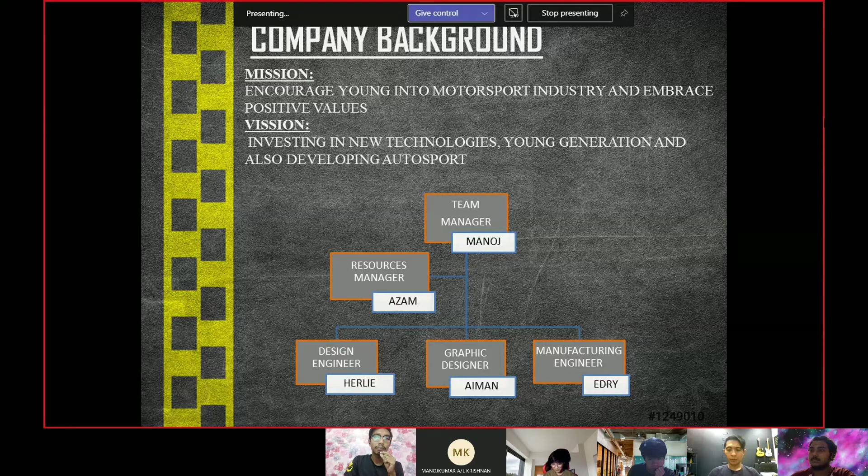Hello, my name is Herlie Jolison, and today I will explain about the concept of design. Our product name is RWD01. For our concept design, it consists of main body, front and rear tires, bearing and drive shaft, front wing and rear wing. Okay, next.

Okay, for the main body, we have modified the design from front to rear. First, we added the side skirt with a curve to ensure good aerodynamics for the design of the F1 body.

The total length for our F1 body is 185, and the width is 60. For the critical part, the side skirt or rear skirt has a chamfer R2, and the distance from the body to the rear of the body is 14.

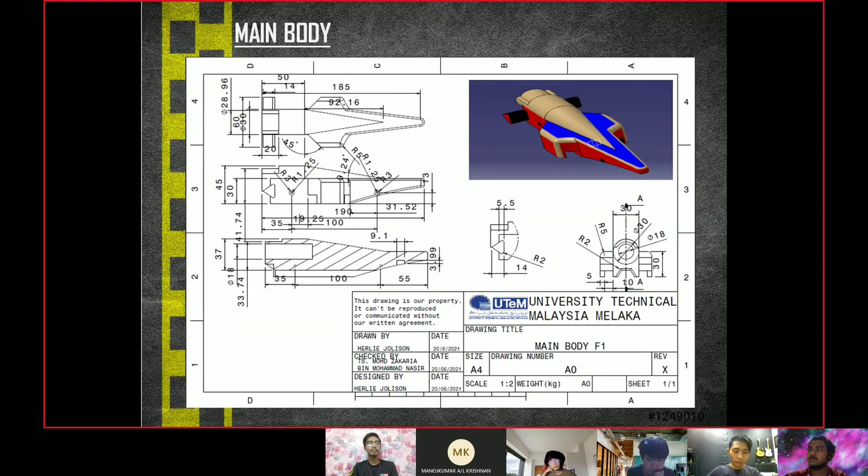For the wheels, in this concept design, I designed the front and rear wheels based on the original design TE37SL. The spoke we made is a concave spoke with zero offset to suit and fit the main body. For the tires, we made a tread pattern to give a sporty look and grip.

It is suitable if this project is printed in 3D. We also made thin tires, so the wheels will look bigger and more sporty.

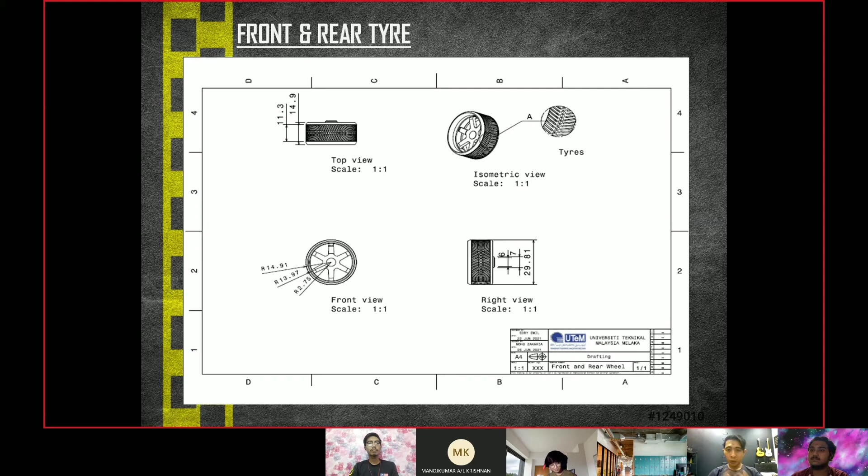Next, we continue with the bearing. The function of the bearing is crucial for the proper function of the hub, tire, and wheel assemblies to work together. The wheel bearing allows friction-free movement and rotation of the hub assembly, thereby providing smooth tire and wheel rotation.

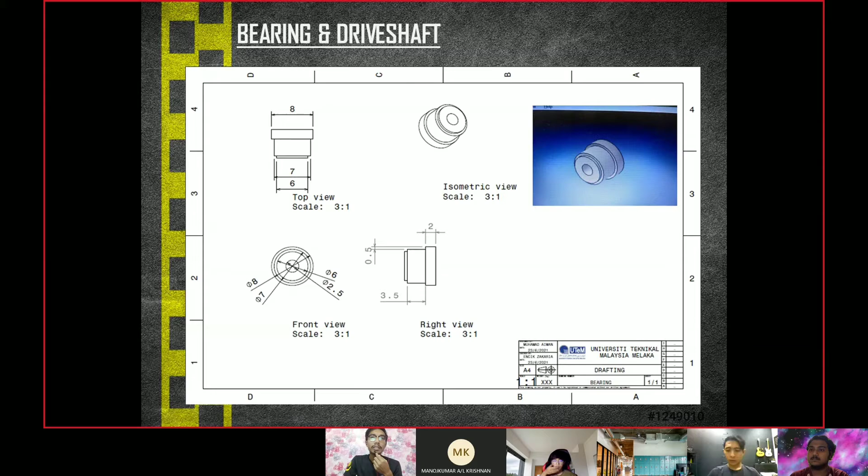Next, the function of the drive shaft is to transfer motion to the tires and reduce mechanical friction. The drive shaft is a component of the drivetrain in a vehicle, with the purpose of delivering torque from the transmission to the differential, which then transmits this torque to the wheels in order to move the vehicle.

I designed this drive shaft with a length of 40. The diameter of this drive shaft is 2.5 mm. This drive shaft is simple but nice.

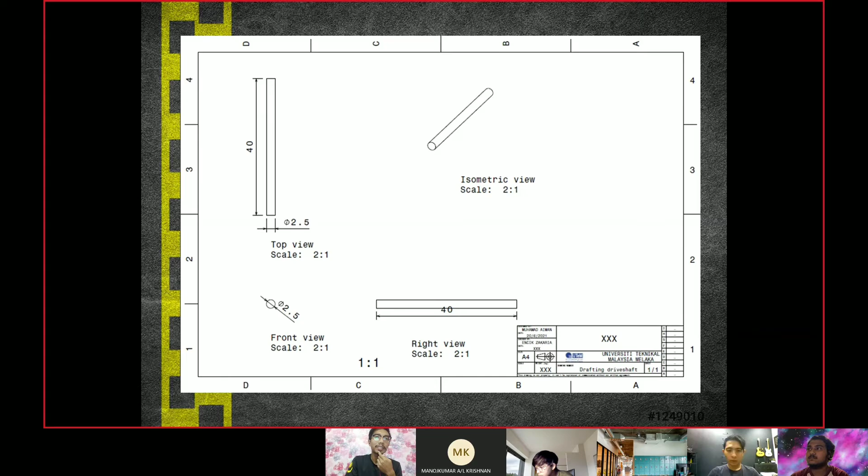Okay guys, my name is Manoj, and I will explain more about the concept behind the front wing design. As you know, the front wing is the part of the F1 that meets the air barrier, which helps create more downforce, more grip, and provides drag to the F1.

The major aspect that plays a better role in the front wing concept is downforce. How we achieve maximum downforce is by having a proper design, with a flat main plate and flap, and so on.

First, the flap needs to have an angle of attack in the range of 15 to 13 degrees. In this range, we are able to achieve the maximum angle of attack, which will eventually improve the drag and downforce.

Next, I've designed the main plate as an airfoil shape, which is a better shape to cut through the air barrier, providing better downforce.

And I've put curves at the end of the main plane, which will create turbulence, which eventually does not disturb other parts and provides better airflow around the rest. So the F1 can achieve maximum speed on the track.

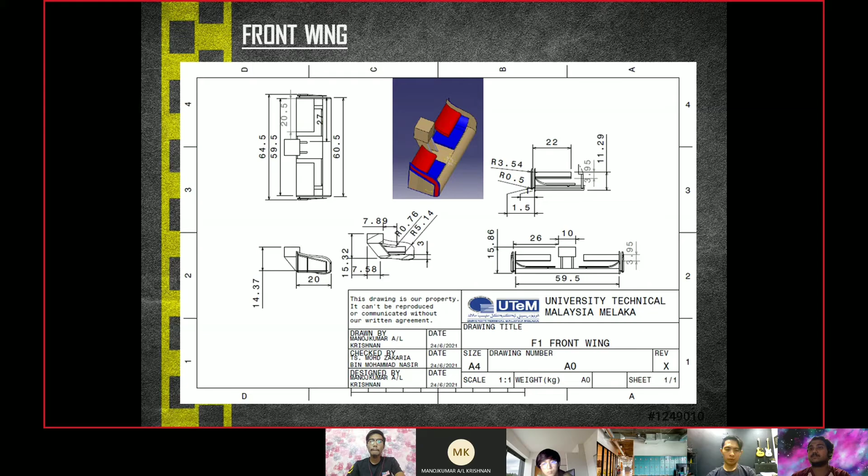Thank you, that's all from me.

For the rear wing, if anyone asks why I chose this design, this design was made according to specifications that have long been established by experts in this industry. With a design like this, it can give a lot of impact to the F1 we have created. The shape and measurement made should be emphasized because it can affect the speed of the car.

I created this design to add more downforce, which in turn adds more rear tire grip. This can improve cornering performance, acceleration performance, and stability at high speed. Okay, that's all from me, thank you.

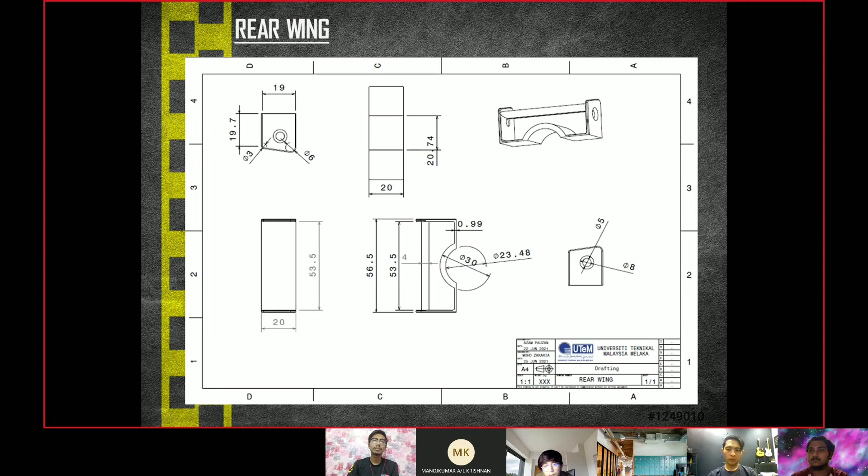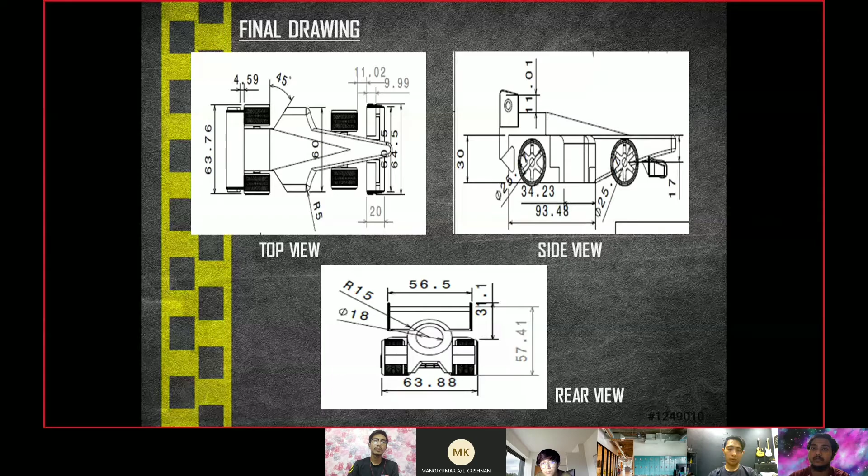We use the software known as CATIA, developed by Dassault Systemes, and we use specific operations to achieve all these drawing materials, which in this case we use for design.

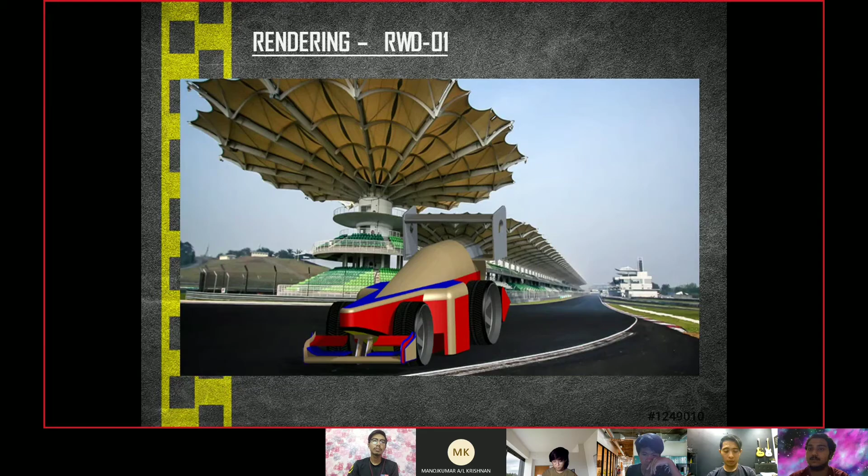Right now I'm about to present to you the final product, RWD01. Okay, this is our final product. We made it into a rendering and added some colors and background so it will be easier and more attractive, as you can see. This is the front isometric view, with a different background.

Next is component analysis. We did some analysis for our design. There are three components that we chose in our design to do the analysis. First of all, we do the analysis for the tire.

The tire displacement magnitude is in mm, and the value we got for the analysis is a maximum of 0.00136 and a minimum of 0.000136. Next is von Mises stress, unit in MPa.

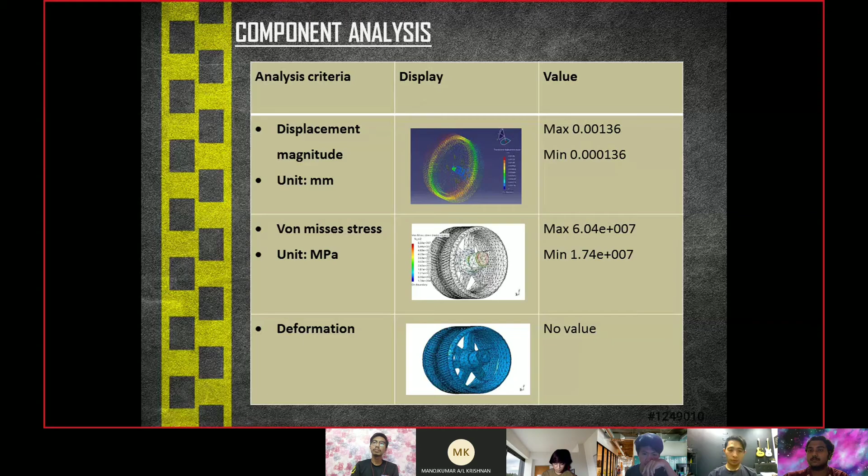For the tire analysis, the maximum is 6.04 MPa and the minimum is 1.74 MPa (megapascal). Below is the deformation for the tire.

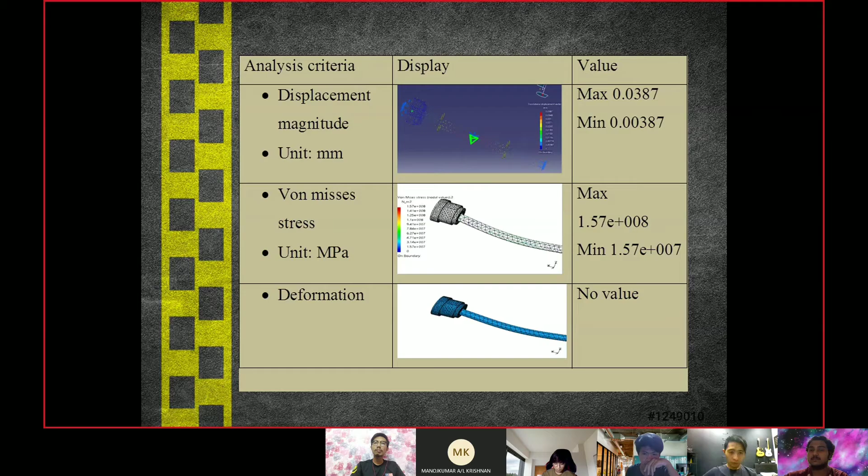Okay, the next analysis is bearing and drive shaft. So the max value for displacement is 0.0387 and minimum is 0.00387. Von Mises stress for bearing and drive shaft is maximum 1.57 megapascal and minimum is 1.57 megapascal times 10 to the power of 7. Next.

So the last analysis for our part design is bearing, drive shaft, and tire. The displacement that we got from the analysis is maximum value 0.196 and minimum value is 0.0196. For the Von Mises stress, it's max 1.13 times 10 to the power of 8 megapascal and minimum is 6.59 megapascal times 10 to the power of 4. That's all from me.

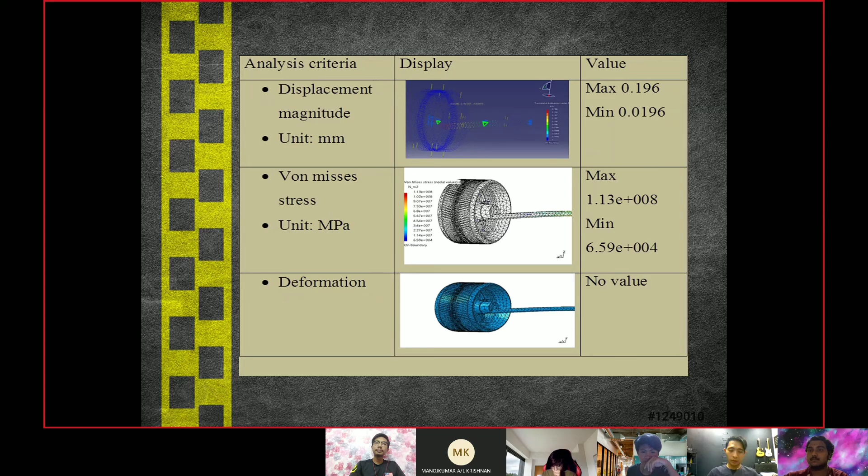Alright, so back to me again. I will present about the factor of safety. For the first factor of safety is the wheel. The material yield strength is 250 MPa. Factor of safety is 4.14. Then the status is pass.

Okay, for the next one, factor of safety is the drive shaft with the bearing. The material yield strength is 250 MPa. The factor of safety is 1.59. Then the status is pass.

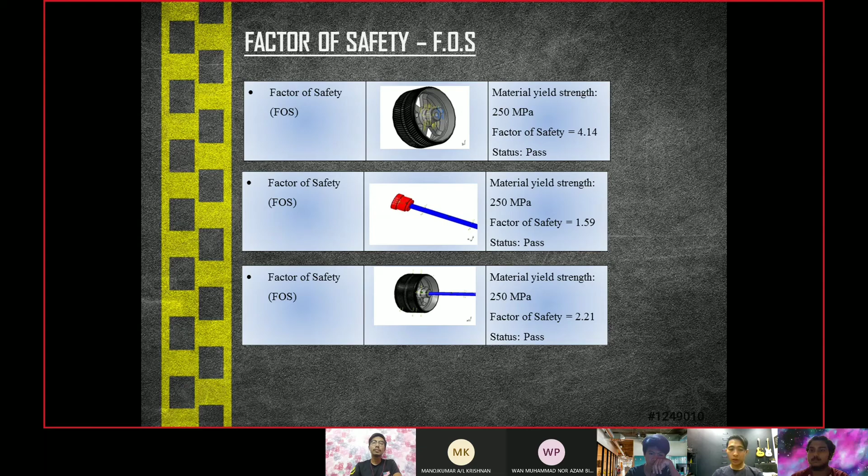Okay, then we go to the last. For the factor of safety, is the drive shaft, bearing, and the wheel. So the material strength is 250 MPa. The factor of safety is 2.21. Then the status is pass. Okay, so we go to the next slide.

Okay, so for the discussion, what we have discussed is the technique to improve design failure. To control the failure occurring, we solve it by doing some modifications on the geometry of the product and determine the problem by looking at what comes up from the simulation analysis.

Okay, we go to the next one. We need to correct the dimension accordingly. Then after that, the ductility and durability of our tire also failed as a result obtained, and we overcome it by changing the size and the material that we selected, which is steel that has good behavior of material strength properties.

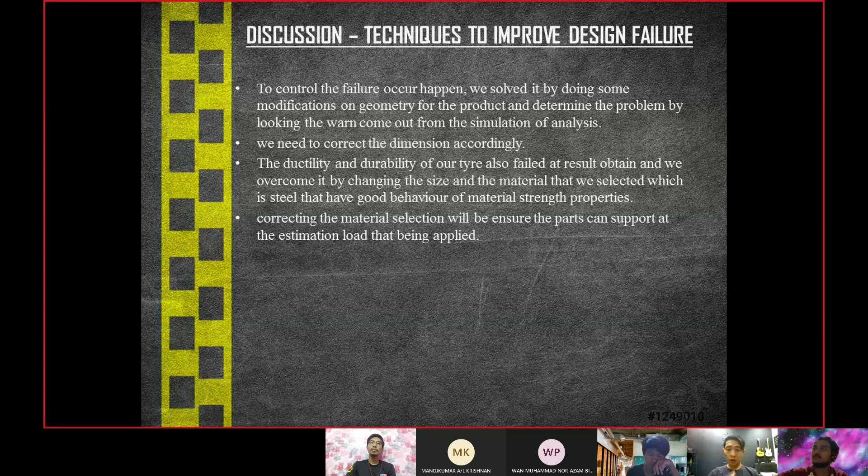Okay, then for the final discussion, correcting the material selection will ensure the parts can support the estimated load that has been applied. Okay, so that is our discussion. Then we shall go to the next slide.

Okay, so the ideas to improve this design. The first thing, if we want to design a car or anything that has dynamic movement, we have to design it with aerodynamics. For the first point, consider the aerodynamic flow, which is by creating a curve at the body kit of the F1 car RWD 01, to ensure it doesn't go against the flow of wind.

Okay, for the next idea to improve the design, the weight of the body also needs to be modified by changing the material of each part to ensure the car will be more stable. After that, the width of the tire also needs improvement in size to ensure more area of friction contact surface for the purpose of braking when at high speed.

Okay, then finally, changing our material properties for the drive shaft, bearing, and tires is to ensure that it can support the weight of the F1 car body and improve the ductility and durability in design. So that's all from me.

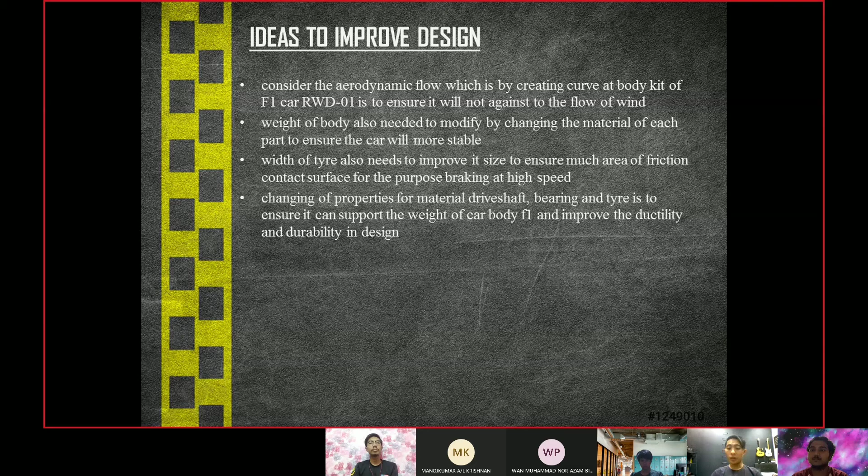Okay guys, let's conclude the entire whole project. We were able to learn to apply the process of engineering to solve real world problems that we face every day in our daily life and also in the future.

This project also promotes active engagement in and excitement about engineering and engineering design at a variety of grade levels. Younger generations can design, innovate, and create their own ideas to produce a better engineer in the future.

This encourages us to create better brainstorming and creativity, incorporating the engineering design process into secondary curriculum, and also be able to learn a variety of essential professional skills through this program.